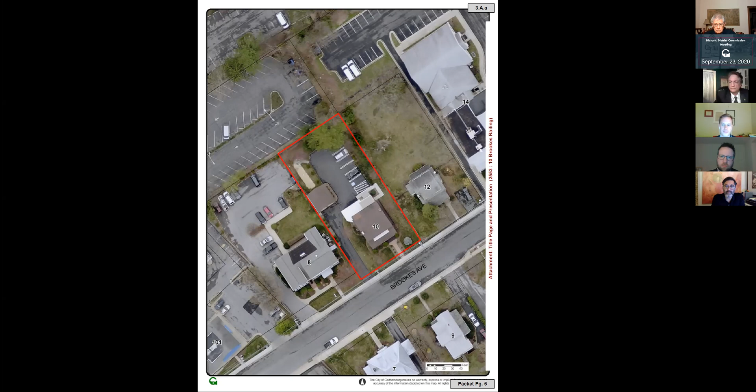A number of sections of the design guidelines apply. Here under house design elements, the first bullet reads that new, additional, or replacement construction work on existing houses should be compatible with the historical design elements.

And if we can go to page 8. Under materials, the first bullet, the historic character of a property shall be retained and preserved. The removal of historic materials or alteration of features and spaces that characterize a property shall be avoided.

The second bullet, deteriorated historic features shall be repaired rather than replaced. Where the severity of deterioration requires replacement of a distinctive feature, the new features shall match the old in design, texture, and other visual qualities, and where possible, materials. Replacement of missing features shall be substantiated by documentary, physical, or pictorial evidence.

And the third bullet, if a material is developed in the future that can provide an appearance that is historic, it may be used on a case-by-case basis. Under painting, the second bullet reads that all trim, including porch railings and floors, shall be stained or painted. If we can go to page 9 of the packet.

Under siding, the third bullet reads that synthetic siding, such as aluminum, vinyl, and others, is not acceptable because these materials are visually incompatible with original materials and can negatively affect original features, such as windows and trim. And then skipping down to the last bullet, it reads, if a material is developed in the future that can provide an appearance that is historic, it may be used on a case-by-case basis.

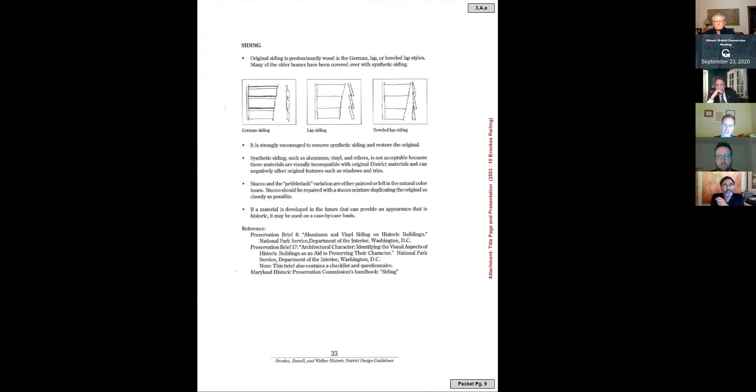If we can go to page 10. And under porches, the second bullet reads that porches should have appropriate railings and or columns if part of the original design. And page 11, please.

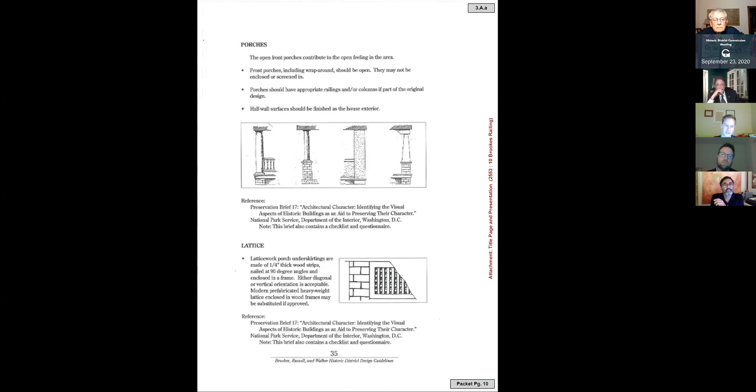So first, for the front porch railing, the applicant seeks to install a pressure-treated wood porch railing around the perimeter of the front porch. The railing will stand 21 inches tall and will be attached to the brick porch piers just below the concrete caps.

The pickets will be rectangular and spaced 3.5 inches apart. The top rail will be 3.5 inches wide. The balustrade will be supported by crush blocks. No posts will be installed to support the railing.

The applicant also provided an alternate drawing for a porch railing that measures 26.5 inches tall. That's the drawing you see in the bottom right corner of this plan, and that railing would extend above the concrete cap. The railing in this plan will be attached to the tapered wood porch columns above the concrete caps.

If we can go to page 12. And this is how the porch looks now. Note that posts have been installed along the porch railing and at the stairs.

These posts appear to be related to a previous plan for the porch railing that was provided to staff that showed 36-inch tall railings with posts. Staff told the applicant that railings that extended above the brick piers would not be appropriate for this Craftsman style bungalow, but it looks like the contractor got to work in the meantime.

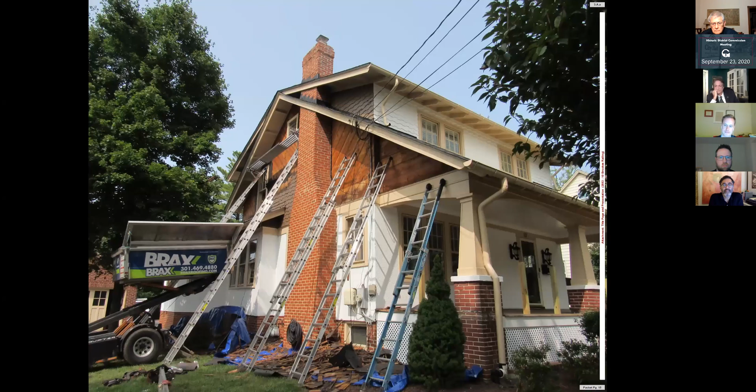So next, the applicant seeks HDC approval to replace the existing wood shingle siding with synthetic Hardie staggered shingles in order to prevent water damage. As you can see from this photo, work already was underway when staff visited the property on September 15th. Staff contacted the applicant and inquired about the project and was told that the wood siding shingles were being replaced with this synthetic shingle.

And of course, this work requires a historic area work permit. According to Brax Roofing, the wood shingles on the rear elevation were replaced with Hardie shingles at an unknown date. The new shingles, as I said, will also be Hardie shingles.

If we can go to page 16. This is a photo from December 2018 before the house was repainted, and you can see some of the water damaged shingles to the left of the chimney.

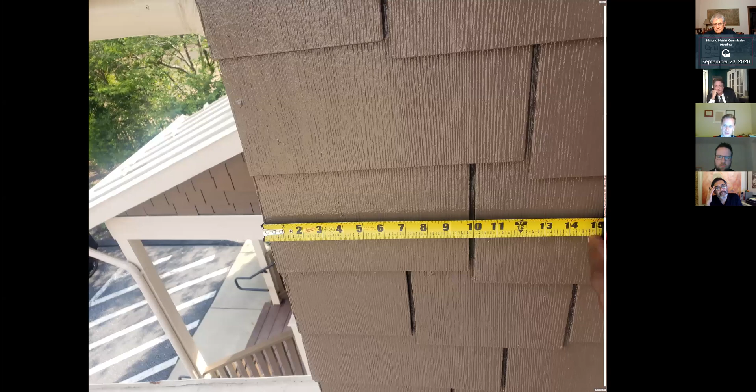And if we can go to page 17. Here's a close-up photo of those existing Hardie shingles on the back of the building.

And if we can go to page 18. This was a photo diagram provided by Brax Roofing that shows the differences between the wood shingles, which are on the left, and the synthetic shingles on the right.

And if we can go to page 19. This is another photo from 2018 before the repaint. The left side of the building closest to the street, those are the original wood shingles, and to the right, closer to where I was standing in this photo, those are the Hardie shingles.

The staff also supports the installation of the synthetic shingles. Staff is disappointed that neither the applicant nor the contractor checked to inquire if a historic area work permit was required before removing the wood shingles.

The wood shingles are a character defining feature of the building, and staff would have preferred in-kind replacement to the damaged shingles. The synthetic shingles are larger in width and thickness than the original. They do not possess the variety in wood grains, and they do not form the same rhythmic pattern.

However, the design guidelines state that if a material is developed in the future that can provide an appearance that is historic, it may be used on a case-by-case basis. Despite the minor differences, the synthetic shingles do closely approximate the appearance of the wood.

It should be reminded the shingles are located on the second floor, so the differences are less discernible from the ground. The wood shingles exhibited rot, and protection of the building is critical. The Hardie shingles should provide a long-term solution while resembling the original wood shingles. They can be removed should there be a desire in the future to restore the original wood shingles.

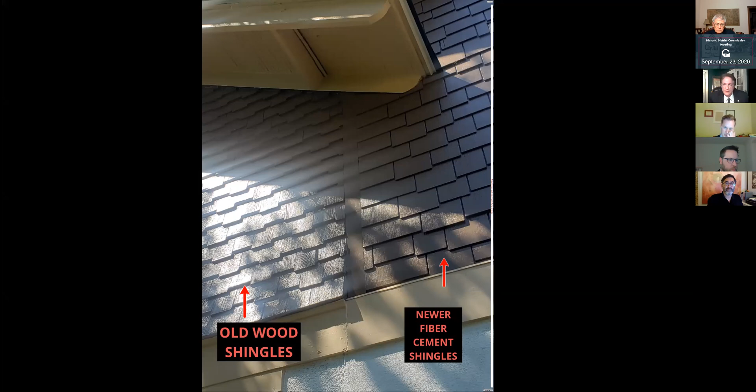And that looks like... Yeah, when I went out there on May or September 15th, it was obviously the rear elevation has been changed, and that was done I don't know how many years ago, at least pre-2018 when I took those photos. So on the south elevation, which we're looking at now, that was almost completely removed. A stop work order was issued by neighborhood services, so work should have stopped then, but okay.

I haven't been out there since then, so I don't know if James or Mark could confirm that work did in fact stop. Yeah, there's been nothing going on. Okay, so that would mean the east elevation and the north elevation are still the existing wood shingles. That's wonderful, that's good.

So we're really only talking about one, and I think you mentioned, Chris, it's the south elevation. And in looking at the south elevation, if we bring that picture back up, it appears that the center part is still intact.

The one, yeah, the other one that you had that showed - there you go. Packet page 15, thank you so much. It appears that the center portion - am I correct in understanding that was original, or is that new? Because now I'm more confused if that's new. This, all what wood shingles you see there, are wood shingles, the original, or should be the original.

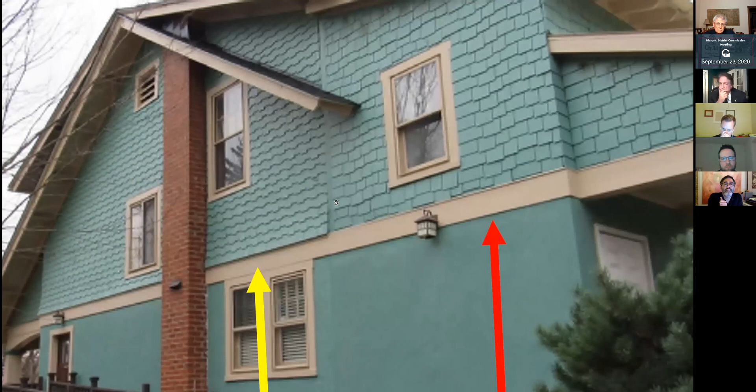So if you see in what I included in the report, the yellow arrow points to the original wood. The red arrow, that's the change, that's Hardie - that's what's been changed already.

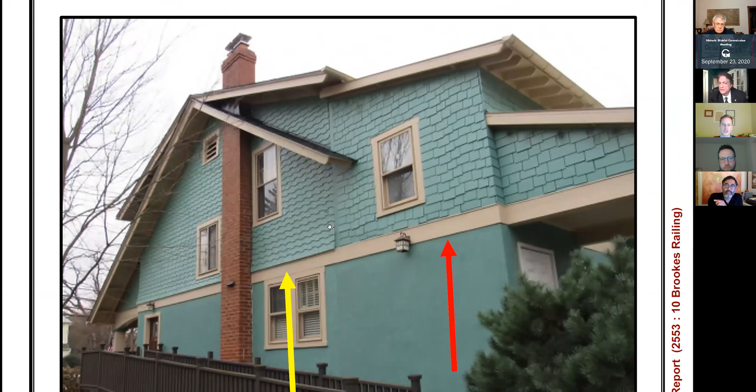Oh okay, so what elevation is this? This is the north elevation. Okay, so there's the north chimney has on both sides changed then? The north has been changed as well as the south is underway. Is that a correct statement? As far as I know, it still is like this in terms of having two different kinds of shingles. Right, but the new shingle was put on the north, correct.

Yes. And it appears that, based on north, I guess it would be the west side is to the right. And that appears - I'm talking about underneath the eave - that appears to be replaced also. So my question is really, how much of the work is done? It appears that maybe 3 elevations, without knowing the front, maybe the front doesn't even have any, or very much. But how much has been done right now? How much of the project has been replaced and considered complete?

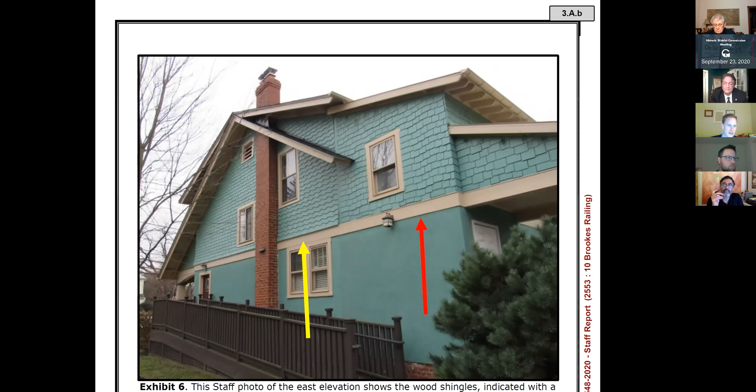I would say this elevation, I would guess the owner considers complete. The right-hand side, which I guess is the western side, that appears to be complete, I'm going to guess. Can we look at the other 2 elevations? We may not have photos of every elevation. Well, we certainly probably have the front, right? Yeah, definitely the front. That would be packet page, let's see, packet page 12, please.

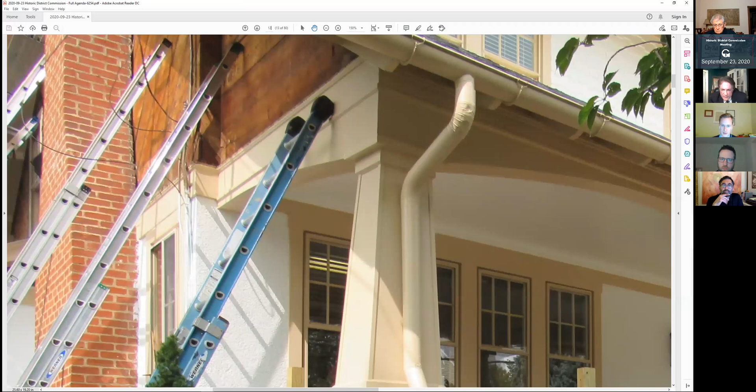So this should be all wood on the - okay, if we can go to page 12 of the packet. Yeah, this should be all wood, so that's original wood, correct. Okay, all right. And then we don't have a rear elevation. What's down below? Is that stucco? Yes. Okay, all right, so front elevation's untouched.

Do we have a rear elevation? Do we know? We should have - well, we do not. The rear elevation is changed. It's completely Hardie. Okay, all right. So we're talking - Brookes Railing did not do that rear elevation.

Okay, so 3 out of the 4 elevations are - two of the elevations appear to be complete as far as the owner is concerned. One elevation, the south, was not complete because the city saw the change and prevented that change. Okay, all right. So I wish there was a real strong answer or pattern - that if you did all of it, that might change my opinion. If you've done none of it, that would change my opinion. To do half and half, that's tough.

All right, so let me go then and continue on my thoughts. The next part would be the railings. Can you bring up the drawing of the railing kindly? That is, let's see.

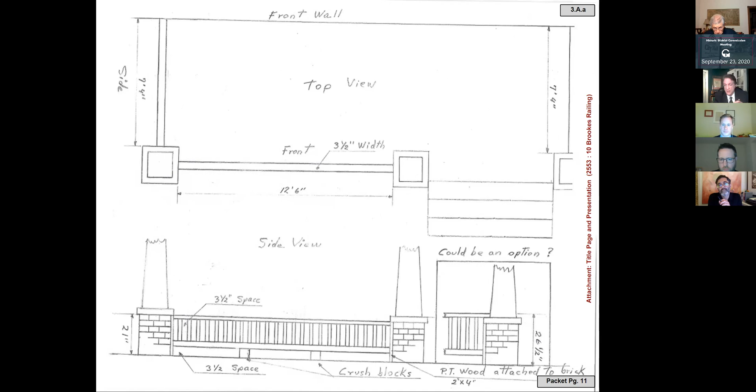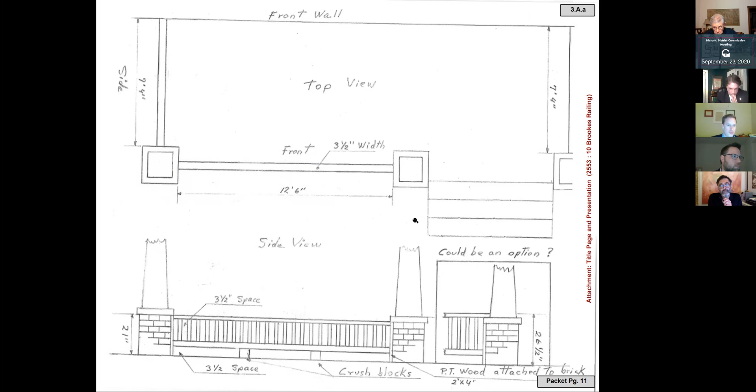Yeah, so can we look at a photo of the front elevation? That would be page 12.

Okay, and so if you look at the risers themselves, I believe there's 6 risers. Let's see, 2, 6, 4. Yeah, and if each one of those is 6 inches or more, it looks like the first one may not be, but if the others are, you're going to be, it appears that you're over 30 inches, which I believe then would require it.

Now I'm not sure the city of Gaithersburg has any exception to that. I read through the city of Gaithersburg's comments of where they required changes, and in that section, I think it was section 312, I'm going by memory, they have an addition, a comment, but they don't have any change to that. So I would think that would be something the city still requires since they adopted the IRC 2018. Can we look at a photo on the right-hand side of the house?

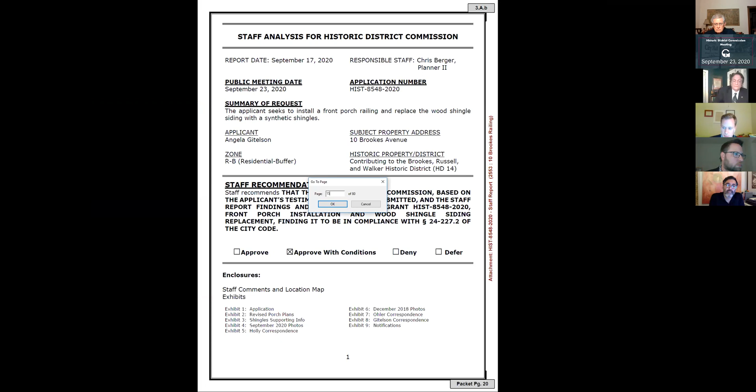So to me, I'm not even sure this is that big of a deal, as far as seeing if the applicant can just mimic the right-hand side as far as the detailing. What I mean by that is the front porch triangle part and the back porch triangular part can be the new siding, because that's what's used on the other end, the right-hand side. And we have to conclude, without any other evidence, that was original to the house, which certainly could have been. Then let us say, particularly because it's down right now, they didn't put it up, that they have to find siding, even if it's wood siding, that matches the pattern that's there now in the center gable area. To me, that sounds like the best thing for the house without much burden upon the applicant.

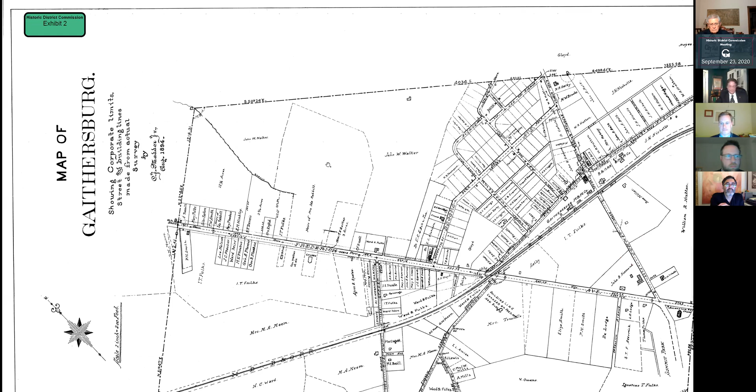If we can go to page 80 of the packet. This is the letter that was written by the Ward family descendant, but page 80 shows an 1894 map. You can't see it too well, but Ward and Fulks own the land to the north of the tracks, where the Thomas Cannery building is now located.

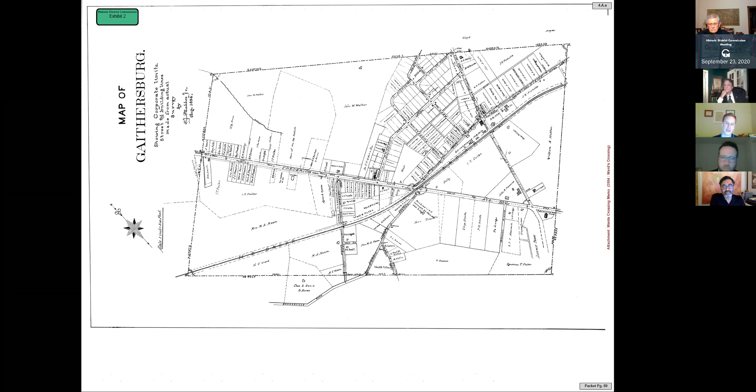So staff has some details to figure out, such as the design of the sign and where it will be located, but we just want to seek your input at this early stage before we come back to you for more details. We just would like to know, yes or no, are you in favor of the renaming and placement of the sign at the railroad tracks in honor of the traditional name of Ward's Crossing?

So you just want a simple yes or no from us? And any other input you would like to add. Okay, all right. Is Ms. Ward here, Helen Ward? No, she was unable to attend. That's why she provided the letter, which was included as an exhibit. Okay, and is there anyone from the public that wanted to make any statements?